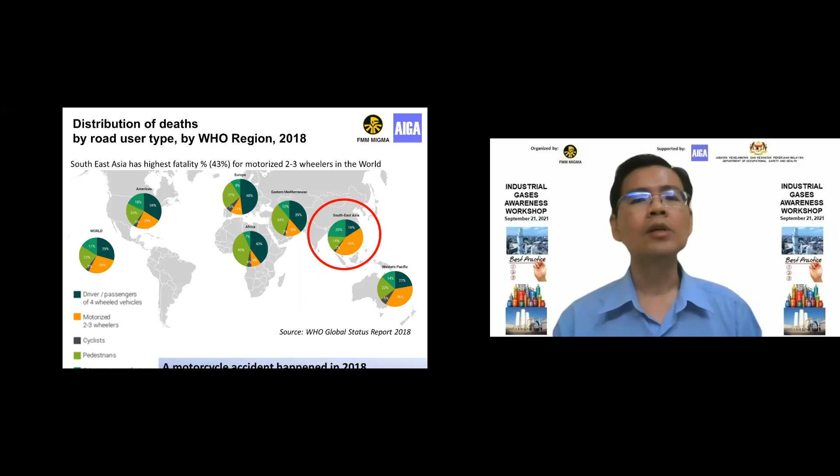Back in 2019, next slide please. We were together with AIGA on this two-wheeler fatality prevention program.

If you look at the statistics here, from 2017 until 2020, this is our AIGA members' statistics in India. In India, we had 6 fatalities related to motorcyclists or two-wheelers, Malaysia had 5 cases, and Thailand had 4 cases. So we know this is a very high risk in Malaysia as well.

So MIGMA was tasked to roll out this fatality prevention program. When we did the analysis, we found the majority involved our youngsters. So we thought, why not have local university students talk to young people? That's why we have this motorcyclist safety video competition.

So in order for those students to understand our requirements and safety information, with help from AIGA and MIGMA, we conducted a seminar for all participants to tell them what safety information they need to input into their videos. We had good participation from all the local universities.

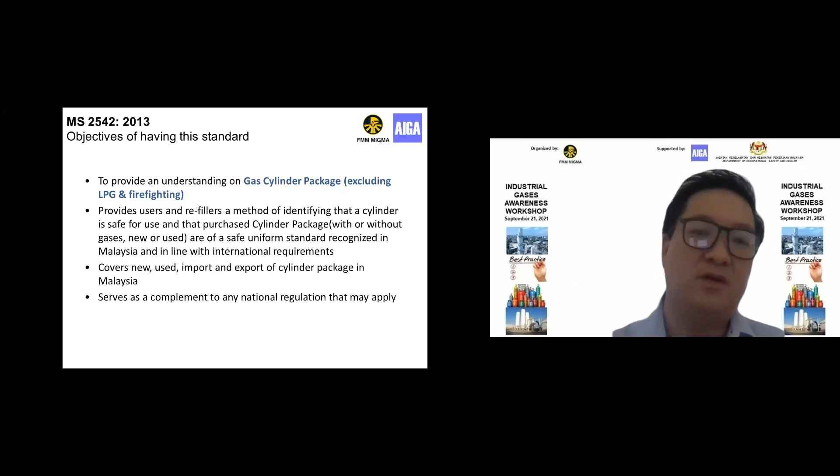It is to complement whatever practices the industry is doing with any national regulation that might be adopted. So a brief standard of MS2542: it covers new and used cylinders. There are two annexes that cover this. Annex A is the design codes of the standards that we adopt. Annex B covers the testing, manufacturing, and design of the specific cylinder itself. It also looks at the compatibility of the material with both the gas cylinder and the valve, looking at the specific gas type to the compatibility of the material that the gas stream would touch. Of course, the gas cylinder must satisfy GHS requirements and transportation of hazardous goods, and this is identified inside the standard as well.

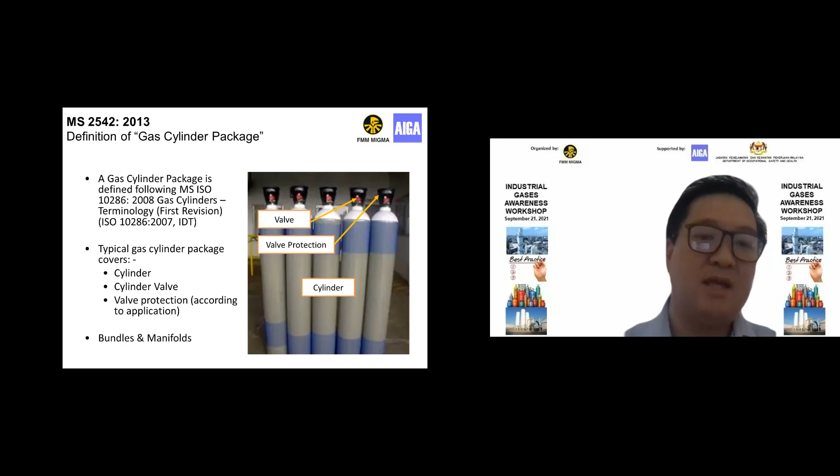Okay, say a gas cylinder package, how do we term it as safe? There are 4 key criteria that we have to ensure. The first is to ensure that it is resistant to mechanical loading. Loading in the sense that we fill and pressurize the cylinder, therefore stressing the vessel. So it needs to take into account the cycles that it's taking. It needs to withstand that. It needs to be able to retain the pressure as well. It must not leak, and it must be compatible with the material and also resist corrosion, because externally it is still exposed to the environment.

Yeah, big one. Maybe next.

Next, okay. So the 4 criteria: resistant to mechanical loading. We have to, number 1, ensure proper manufacturing of the material itself. We have to have sufficient thickness and also proper maintenance of the gas cylinder. The cylinder valve has to have the ability to withstand high impact, and also the valve protection, if used, should follow ISO 11117.

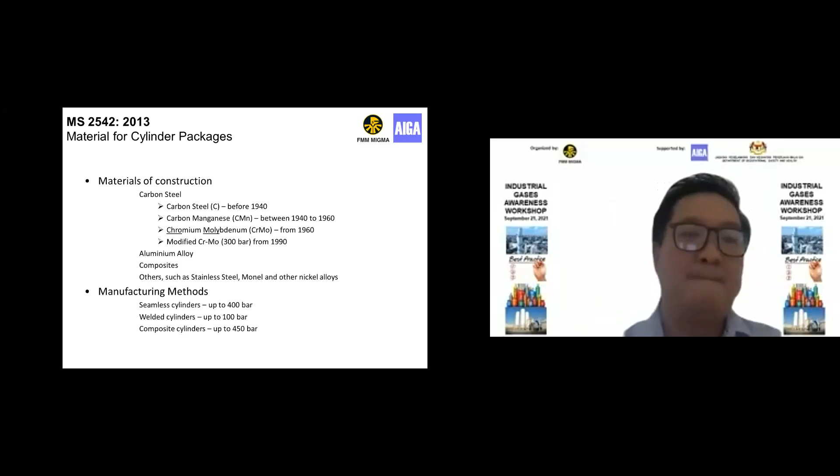Carbon steel, the most common, is the heaviest of all the cylinder types. It's used for hydrogen and its mixtures, but the material composition needs to be looked at. It needs to withstand sustained load cracking due to hydrogen embrittlement, so a special component needs to be added to the material while manufacturing these cylinders. It's vulnerable to corrosion from moisture, and not recommended for CO and CO2. RPV or NRV valves, which I'll go through later, are recommended to ensure minimum internal corrosion due to ingress of air and moisture. Next.

Carbon steel cylinders, corrosion. It's very important for us to keep the cylinder internals dry. Production processes are important to ensure that the gas we put in the cylinders is safe. What we have found is that the higher the pressure, the higher the strength of steel used, and the more susceptible it is to corrosion.

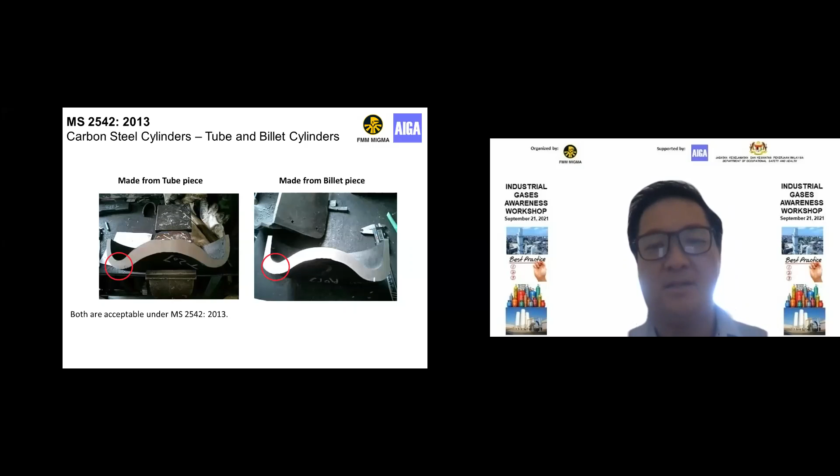Stress corrosion cracking, carbon monoxide. We do not recommend carbon steel cylinders for a CO gas stream because of the risk of stress corrosion cracking. There will be transgranular cracking appearing in the material itself that reduces the effective efficiency of the cylinder in handling the stress. Okay. Next big one.

Aluminium cylinders have normally been used since the 1950s, the majority in military. After that, they moved to be used in beverage, scuba and firefighting rescue because of their light weight. It's 1/3 the weight of steel, but generally more expensive, 3 to 4 times more expensive.

It is good against the corrosion that affects steel, but as said, moisture and acidic solutions are an issue. Heat is also a problem. Therefore, plastic test rings need to be used to detect if the cylinder has been subjected to heat. The normal temperature we would control it at is around 80 degrees C.

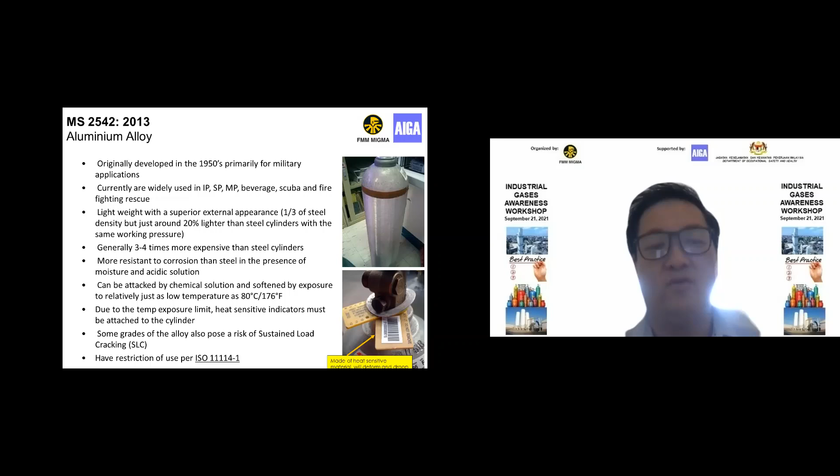So when we handle it and put it in the outdoor environment, we would normally put it in the shade. In the sun is okay because the heat of the sun on the cylinder will normally bring it up to about 60 odd degrees C at the most. Bear in mind that some cylinders need to be monitored against sustained load cracking for some materials of aluminium. Okay, next one.

Composite cylinders, fiber wrap cylinders, are the latest technology. They have a limited life of 15 to 25 years. They are actually plastic lined cylinders with internal, normally stainless steel, wrapped externally with a fiber.

So these are very, very light and can withstand very, very high pressures, normally above 300 bar. But because the fiber wrap is important as an encasement, additional care needs to be taken when handling these cylinders. Okay, next.

MS2542 is the reference standard we are using, the base standard, I could better term it that way. The base standard that we are using for manufacturing of cylinders is basically MS ISO 9809. This is not reverse engineered, but adopted from ISO 9809. It was developed in 1999, and it covers the design, prototype testing, and the mechanical testing of cylinders.

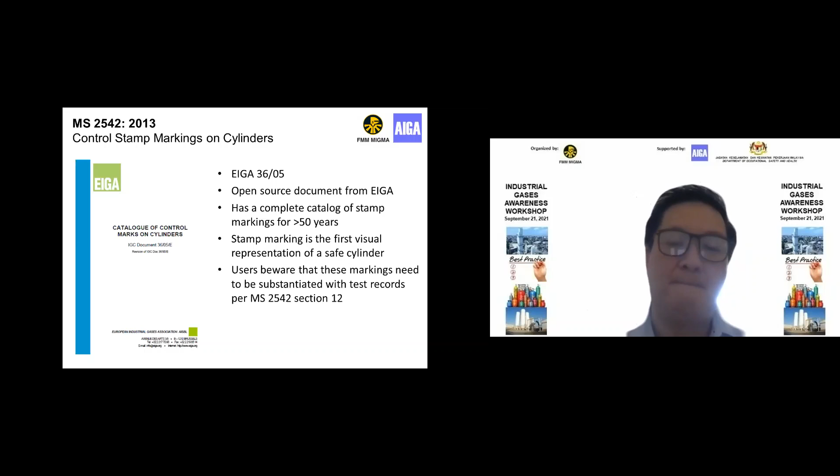One note of caution is that these stamp markings need to be substantiated with testing records. Okay, next. So after the cylinder manufacturing process and the different types of cylinders, we go on to the gas cylinder valves.

It's used to seal the gas in. It needs to resist corrosion, allow flow of gas, and also control the flow to a certain limit. It protects the cylinder from internal contamination. RPV valves last for a long time. Experience in the industry shows that 30 years so far is the limit. And it needs to resist abuse from users, mainly. Okay, thanks.

There are two main categories of valves: basic simple valves and complex valves. I'll go through the terminology between these two later. Materials: copper alloy, brass predominantly, are used for the valves. Stainless steel, nickel, carbon, as well as aluminium alloys are very rarely used. Again, the reference is ISO 11114 part 2 for valve compatibility. Sorry, typo error here. Next.

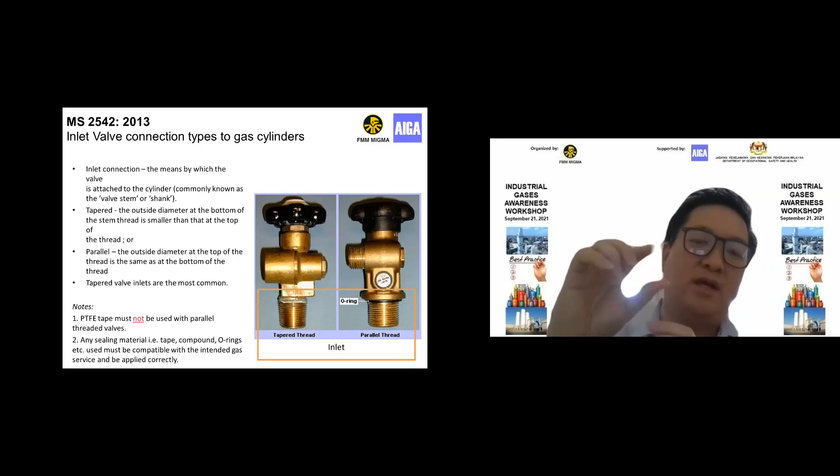There's actually parallel, which is on the right hand side, and also tapered. Tapered has an angle to it. So the only thing to observe here is for tapered, we put PTFE tape around the thread. For parallel, there must not be any PTFE tape around it, because as we screw the valve in, the PTFE will compress and push up. That will compress the O-ring, which might not seal the gas properly. So PTFE is not used for parallel thread valves.

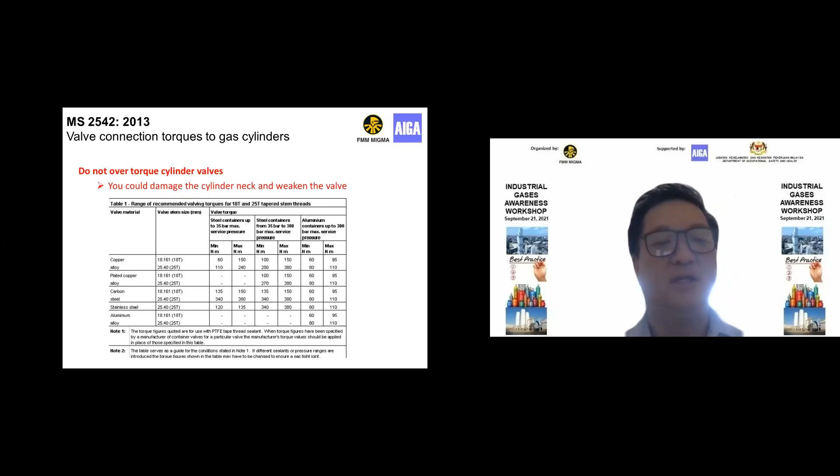Okay, next. Torque limit is important depending on the material of the valve and also the cylinder. A different torque would actually damage either the cylinder neck or weaken the valve by stretching and then work hardening the brass valve itself. You'll be able to see that there are different torque limits for the valves.

So oxidizing has a different connection versus a flammable gas connection. Flammable has a left-hand thread, which is anti-clockwise movement, while a clockwise movement is for oxidizing valves and inert valves. So there is no way to mix up these two together. Other connections such as pin index for medical use are available as well. Next slide would be for medical.

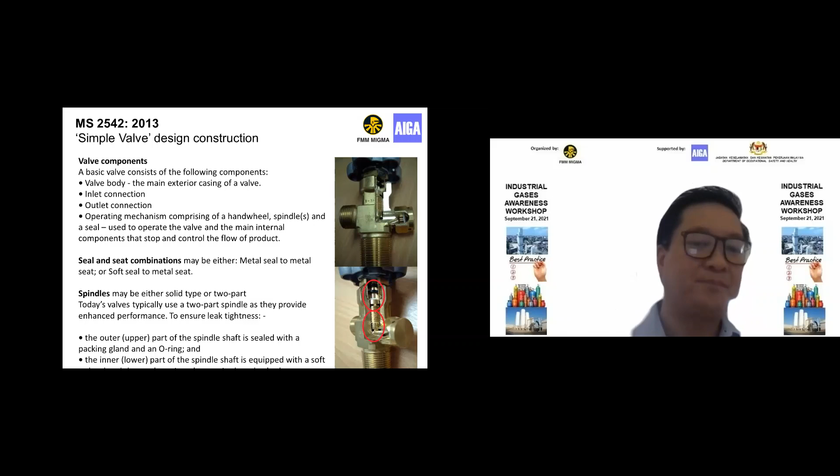The spindle can either be a single part or two parts. In our industry, normally it is two parts. For the newer valve designs, it is two parts. Okay, next.

Okay, there is a benefit here, in that the cylinders can be top filled because the gas inside the cylinder is maintained. Of course, additional checks are needed to ensure that the valve is actually operating well before it's sent in for refilling. As you can see, because there's like a check valve, it prevents the gas from actually flowing back into the cylinder.

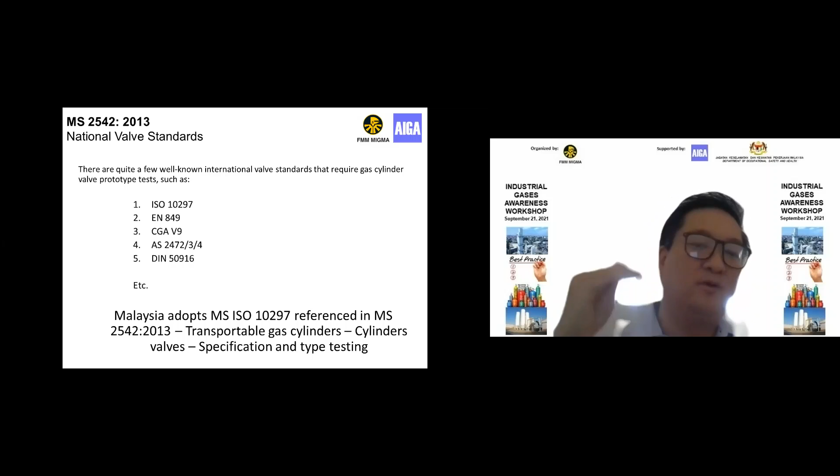Okay, next. So the standard for the valve that we adopt in Malaysia is MS ISO 10297. It is referenced in 2542 as well. MS ISO 10297 is actually a combination of standards. You can see EN, CGA, DIN, AS is also inside there. The testing of the valves follows protocols identified here. I've put in some examples of ISO 10297, EN 849 as the test standards that are being used.

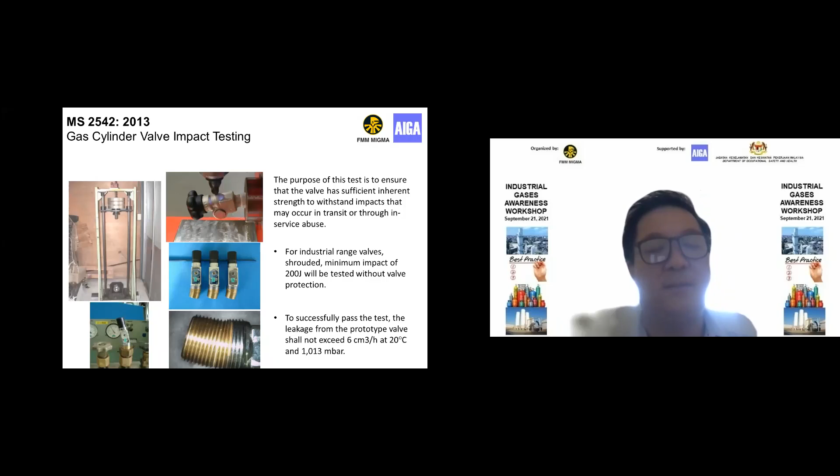Okay, there is also what we call a flame impingement test, whereby they subject the valve to high heat and a flame. It's very, very high temperature for a short burst period of 1 minute to see whether it can withstand the temperature. After that, it is cooled down and tested again to ensure that the valve still has the capability to function, what we call function, as in it can be closed. Okay.

Gas cylinder valve torque testing. This is to ensure that if the valve is subjected to a high torque, it does not break catastrophically. So this test provides a criteria of how the testing needs to be done to ensure that even though there is over-torquing, the valve does not shear. Okay, that's just a brief on it. Next one.

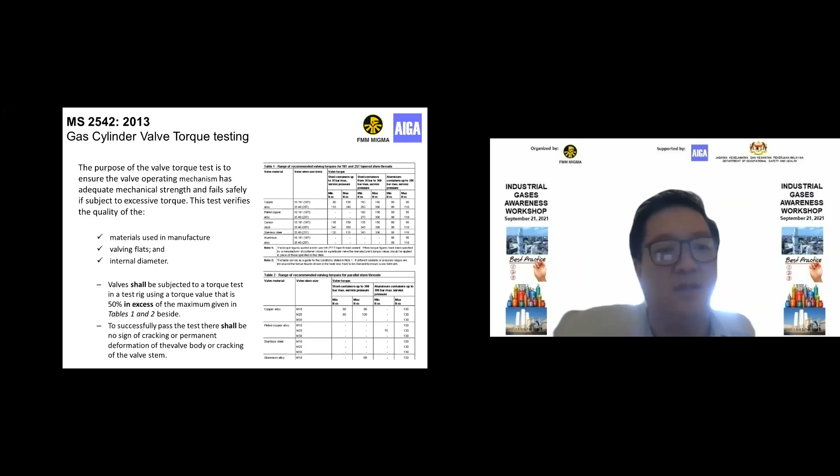Type testing. Okay, it also covers the pressure tightness, to test the pressure leaking of the valve itself. Sorry, this one is actually for leak testing. Okay, so leakage rate is tested to ensure gases such as flammable and toxic are sealed in the cylinder itself, and do not leak out to the environment. So this test requirement covers that process. Okay, next. I'm a bit slow on the time.

There's also endurance testing on the valve. Okay, endurance testing is the cyclic effect that we subject the valve to, how many times opening and closing of the valve. That relates to the number of cycles, which relates to how many years the valve can be in service. So testing how many times it opens and closes will confirm the durability of the valve in that period of time.

Bearing in mind that there is also an age of the polymer of the valve itself. So that age of the polymer subjects the valve to scheduled maintenance, which is covered under MS 2542 under a substandard category of the standard itself. Okay, next.

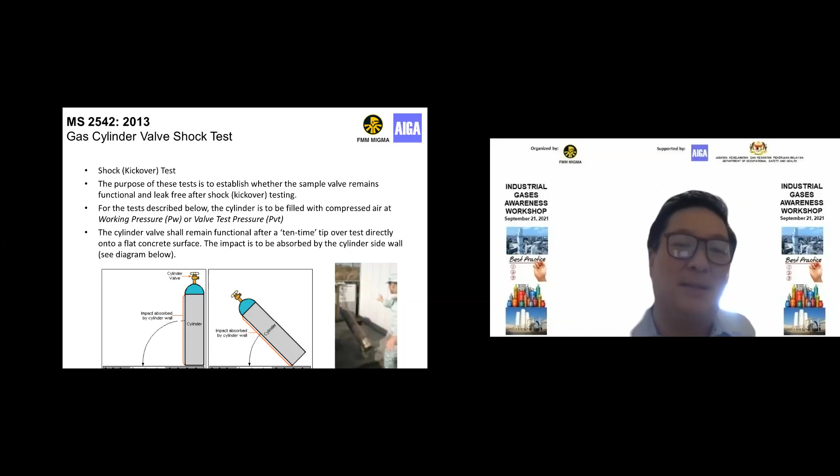Okay, this one is more relevant to our industry, cylinders falling. So as a gas cylinder falls, the valve will be subjected to a certain shock. During that shock process, the valve needs to be able to withstand that criteria. The test identifies that it needs to go through the tip over test 10 times. Okay, so I would say it's a practical way for us to identify whether it can withstand or not. Okay, next.

Salt spray test. Our cylinders go through an environment whereby we are subjected to the sea environment. So the neutral salt spray test will identify whether salt or what we call chemicals will subject the cylinder to pitting, okay, or corrosion.

After this test, the cylinder valve is actually taken out. We actually do a micrographic examination of the material, the corrosion on the surface itself, to see how much it has actually pitted or eaten into the valve material itself. So that amount of pitting will identify whether it is able to withstand the corrosion or not. Next one.

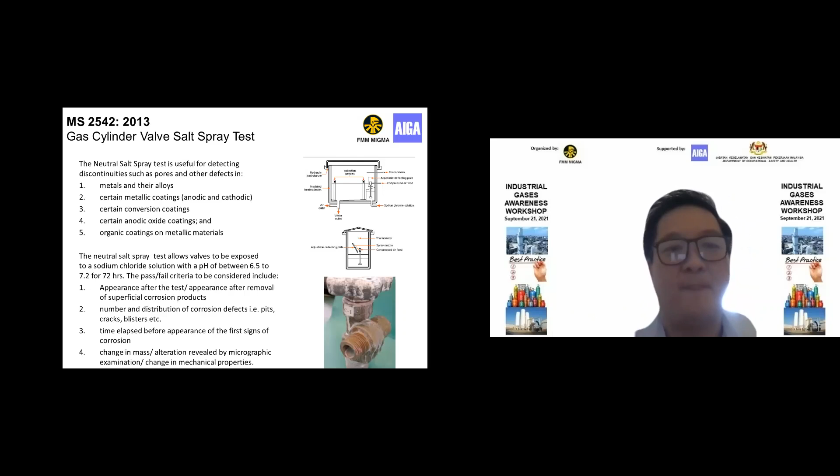Okay, next. Valve protection. Next slide. So, some images of cylinder valve guards and protection that are used in the industry.

So for cylinder valves that meet MS2542, the standard identifies that it is not mandatory to have valve guard protection. It should be applied depending on the risk assessment of how the cylinders are handled, and also the environment that the gas cylinder is subjected to. So in certain conditions that are high risk, where a fall is a high risk, then of course valve protection needs to be used. On the right hand side are some examples of valve protections used in the industry. There are metal and also plastic types used in the industry.

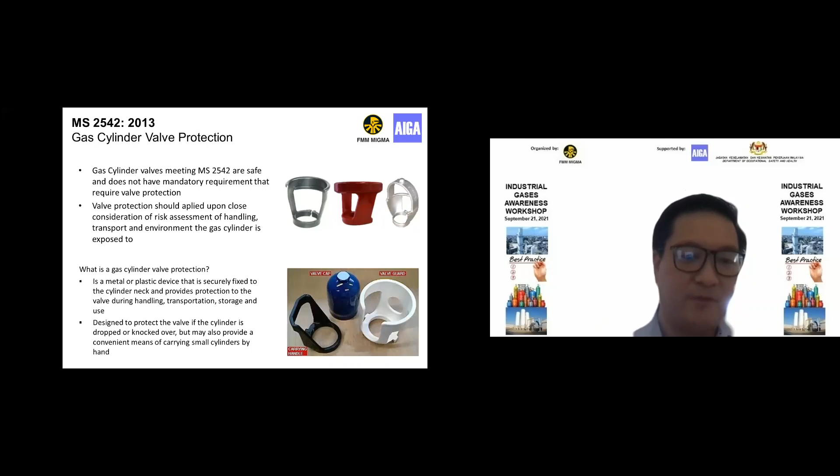So an image of how a valve protection should be: it should cover the entire valve itself in terms of its radius and also the height. It should not expose any part of the valve in any way when the protection is up.

So for valve protection, this is the test that is done. They do a torque, axial, and also a drop test on the valve itself to ensure that the valve can withstand. The standard that is adopted is EN 962.

Next slide. So a torque test is to ensure that the valve guard interfacing with the neck of the cylinder does not come off. It is to ensure that it grips at a particular moment when it falls, and it doesn't come off and then affect other things. There's also an axial test to test the mechanical strength of the valve protection, and also a drop test. The image just now shows dropping it to see how it takes the damage and also the impact. So I think that's all.

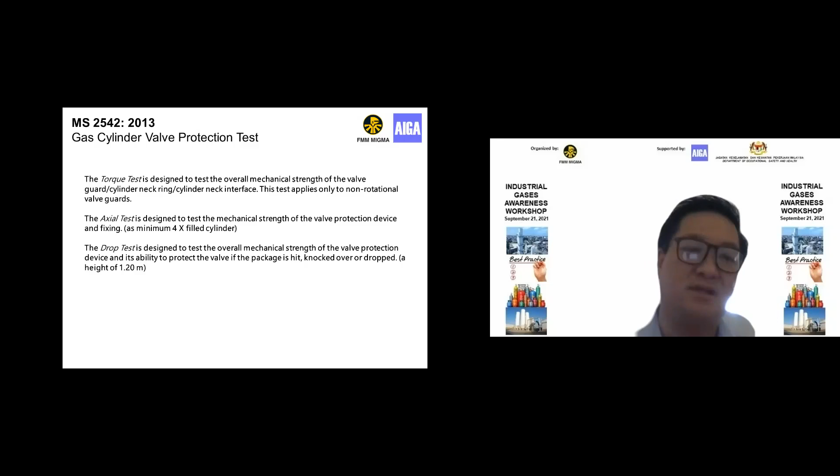We'll move on to the next presentation, which is on ASU process and cold box design. This will be presented by Ms. Jesselyn Tan of Asia Industrial Gases Association, AIGA. A brief introduction of Jesselyn: she is currently a process safety engineer for Southeast Asia Cluster Large Industry of Air Liquide. Her previous work experience includes technical risk and safety consultant in the oil and gas industry, on-site engineer in a power plant, and safety engineer in a catalyst plant. With that, I pass the floor to Jesselyn for her presentation.

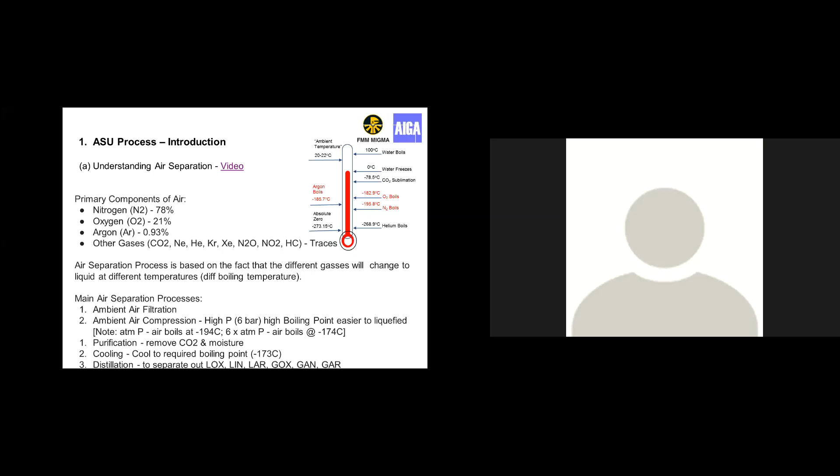Air from the atmosphere is filtered to remove dust particles and other hard impurities. Then the filtered air is compressed in a compressor, up to 6-bar pressure, to make the air flow from start to end of the process. If the air is compressed, then temperature will increase due to increase in kinetic energy of air molecules.

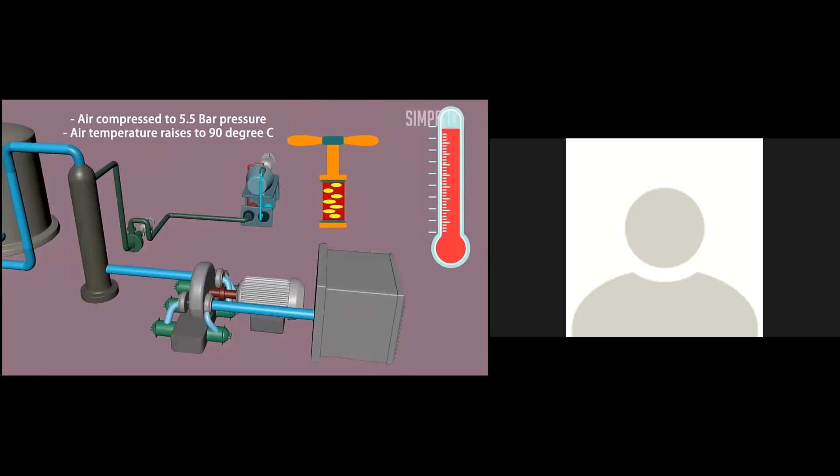So the high-pressure air, at high temperature, is cooled in the pre-cooling system to around 10 degrees Celsius using refrigerated water. During this cooling process, air will capture additional moisture as it is in direct contact with water.

So at this stage, high pressure, low temperature air has impurities like water, carbon dioxide and hydrocarbons, which are not required for us. Water, hydrocarbons, and carbon dioxide are removed in the purification units, using molecular sieves and activated alumina. If water and carbon dioxide are not removed, they will form ice in the lines, resulting in blockage of the air path.

If hydrocarbons are not removed, it will result in explosion if it accumulates. Now, at this stage, low temperature, high pressure air contains only oxygen and nitrogen.

This high pressure air is then expanded in a Joule-Thomson valve. This adiabatic expansion results in a drastic drop in temperature from 10 degrees Celsius to -120 degrees Celsius.

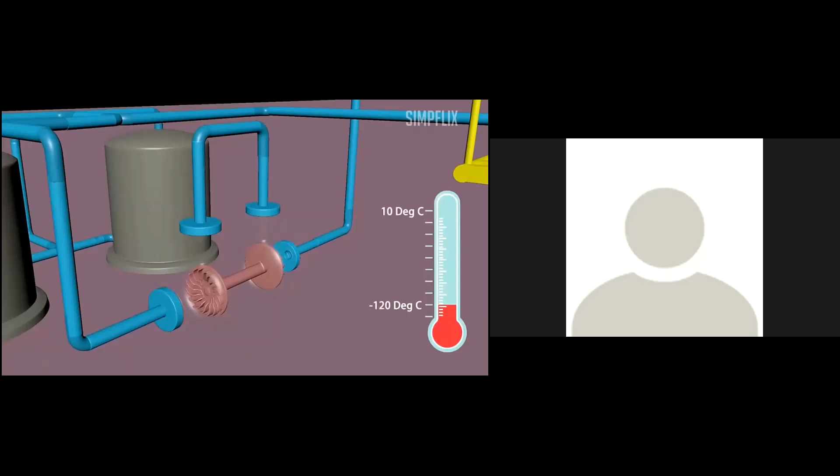Then this expanded air is passed to the fractional distillation column. Cold air passes through the heat exchanger and fractional distillation column. Air temperature is -165 degrees Celsius.

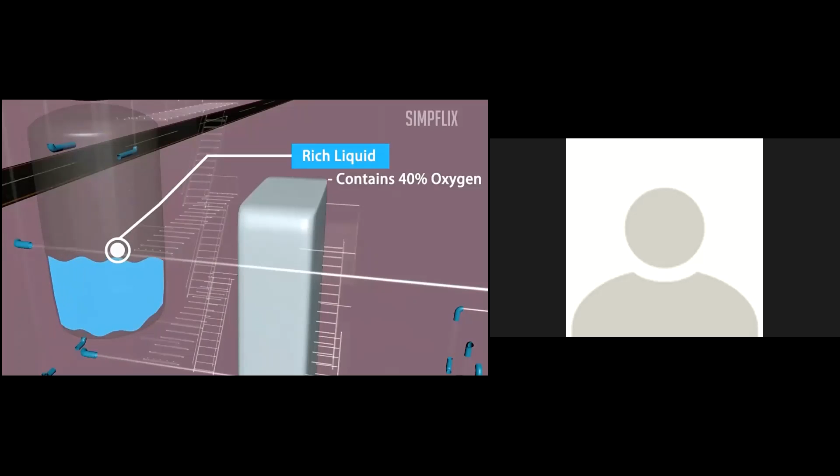At this temperature, air inside the fractional column will get liquefied, and this liquefied air has 40% content as oxygen. This liquid is called rich liquid, as oxygen is taken and given as reflux at the middle of the fractional distillation column. This cold, rich liquid...

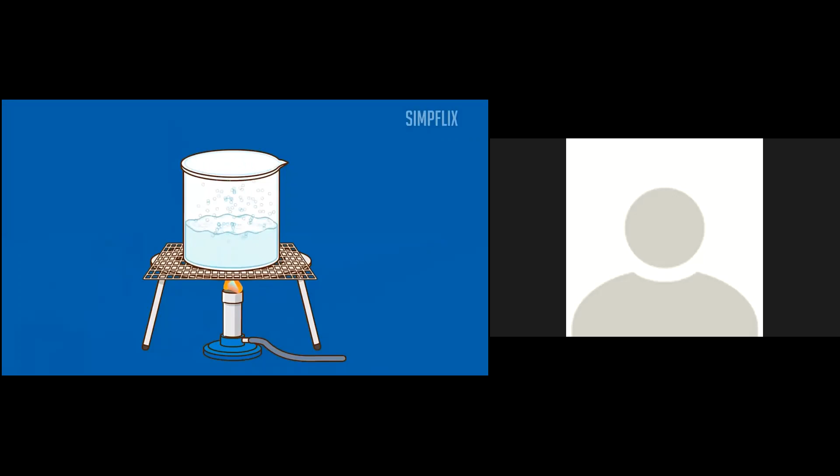This vapor will get condensed, and the remaining nitrogen will escape to the top. This is because nitrogen has a lower boiling point than oxygen. This process is similar to the condensation happening at a vessel with boiling water when closed with a lid - because of the lid's coldness, escaping water vapor gets condensed. In the distillation column, cold reflux acts as the lid.

To have proper contact inside the distillation column, trays will be kept. Sieve trays, packings are also used, hence proper heat exchange occurs. By repeating this process for a long time, a temperature gradient forms from the bottom of the distillation column to the top.

From -170 degrees Celsius at the bottom of the column to -196 degrees Celsius at the top of the distillation column. Because of this temperature gradient, oxygen will be liquefied at around -183 degrees Celsius area and collected.

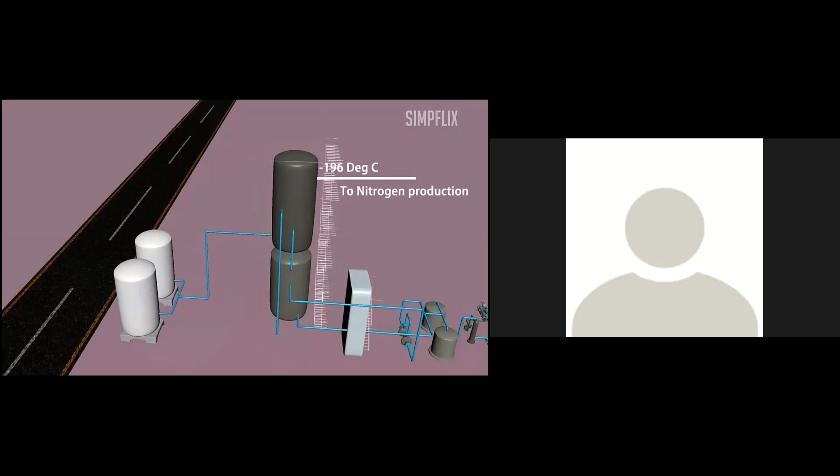Argon is liquefied at around -186 degrees Celsius area and collected. The top temperature is at -196 degrees Celsius, where nitrogen is collected.

Normally, the height of this distillation column will be around 40 meters, depending on the production capacity of the oxygen plant. Oxygen produced using this technology will have a purity of 99.5%. The liquid oxygen produced can be taken as a liquid product and stored in insulated cryogenic vessels.

Later, it can be transported and converted to gas using vaporizer coils. This gaseous oxygen can be used for distribution to end users. The advantage of transportation in liquid mode is such that 1 cubic meter of liquid can be converted to 700 cubic meters of gaseous oxygen.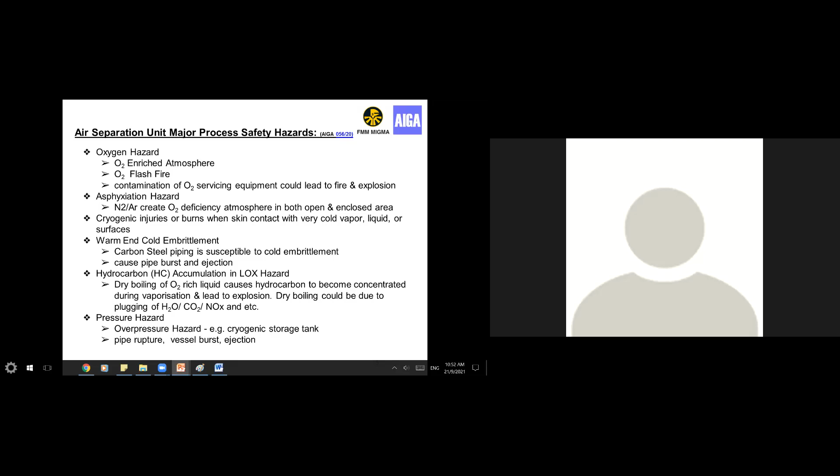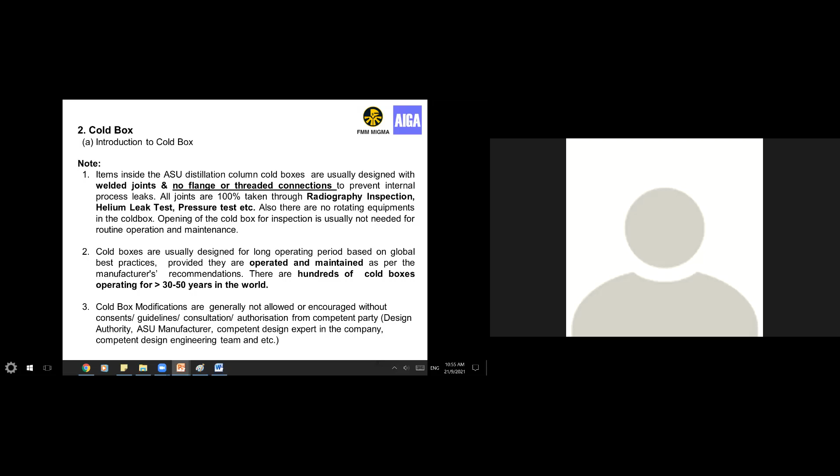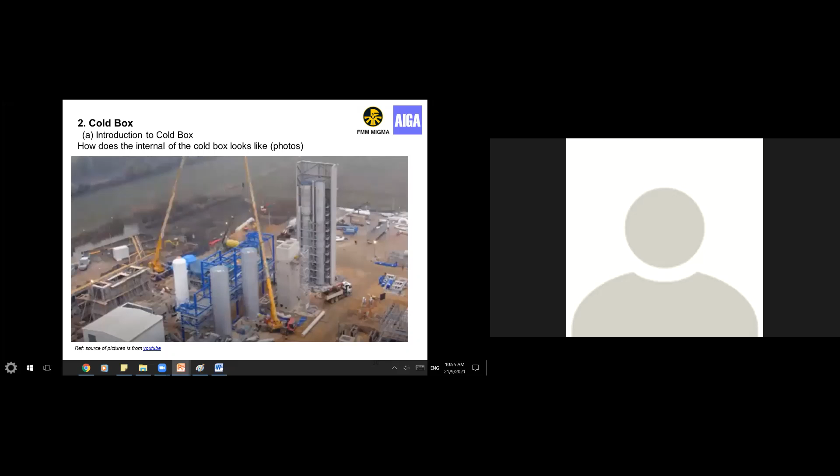This photo shows the internal of the cold box during construction. If you look at the tall cold box, which is opened up with two columns inside, those two columns are actually the distillation columns, can be a nitrogen column, argon column, or oxygen column.

Next we will go through the safe operation of cold box. It's essential to ensure the atmosphere inside the cold box is monitored closely and within normal range, for example the purge gas pressure, flow, and composition, as purge gas is usually injected into the cold box continuously.

Manufacturer SOP shall be available for different operating and maintenance modes, including warm startup, cold startup, normal operation, cold shutdown, warm shutdown, and also recommendation for periodic inspection and maintenance of the cold box.

Next we will brief through some process safety incidents involving poor cold box management. What happened here is about the presence of an ice block inside the cold box. The ice block was not detected before plant startup. As a result, during warm startup, the ice block in the cold box limits space for piping thermal expansion.

This led to pipe bursts and leakage occurring in the cold box. Eventually, the plant could not start up and needed to shut down. The major cause of ice block formation inside the cold box is due to moisture from the air entering the cold box. So how did moisture ingress occur?

This was due to insufficient cold box nitrogen purge, leading to insufficient positive pressure inside the cold box. As a result, higher atmospheric pressure causes water to enter through cracks and holes on the roof or casing panels, with lack of corrosion control.

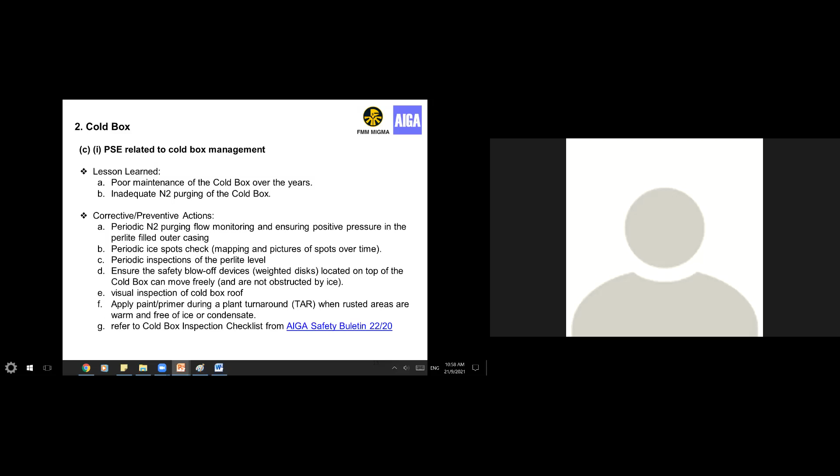Sixth is applying paint or primer during a plant turnaround where rusted areas are warm and free of ice or condensate. Seventh is to refer to the cold box inspection checklist from AIGA Safety Bulletin 22/20. We will further discuss this in the upcoming slide.

Second incident: what happened was the perlite in the cold box was removed to allow a local pressure vessel inspector to inspect the vessel in the cold box. An inexperienced contractor was engaged and they decided to remove the perlite from the bottom of the cold box, not from the top as required by the SOP.

Perlite removal at the bottom caused a steep slope of perlite in the cold box. The perlite then collapsed, generating a force that lifts the cold box relief devices, relief valve, and releases the perlite into the environment. So perlite release can be hazardous to both environment and human. If there's any internal process leakage saturated in the perlite, a large cloud of O2, N2, or argon can form from rapid vaporization.

Due to the safety concerns of a possible perlite release from deperliting activity, and also the possibility of moisture ingress into the cold box, ASU manufacturers generally would not advise opening the cold box for periodic inspection. It will only be done if there's an unexpected leak due to improper monitoring and operation.

All right, so what can we do to ensure safe operation of cold box? First, we need to ensure the periodic inspection of the safety control devices to manage the major process safety hazards, as most past incidents of ASU are from this process hazard, not the cold box design itself.

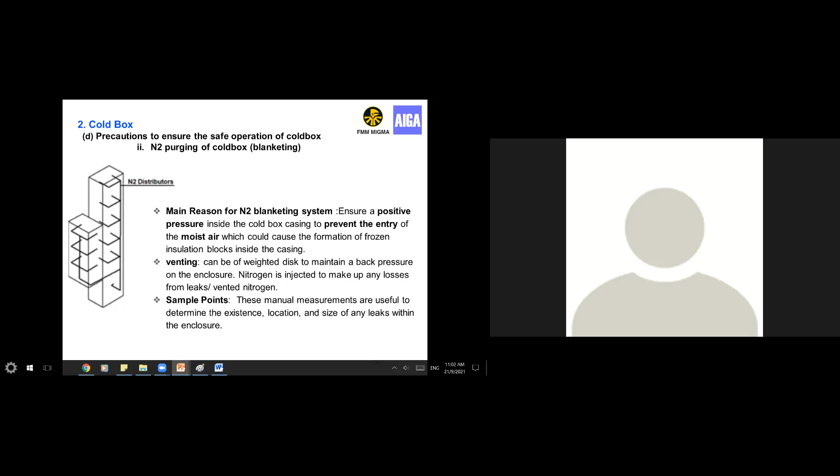The cold box needs to have a venting system to prevent overpressure and accumulation of hazardous gases. It can be a weighted disc to maintain a back pressure on the enclosure. Sample points at different heights of the cold box shall be available to allow complete periodic inspection. N2 purging shall be distributed evenly throughout the whole height of the cold box via a distribution system shown in the picture on the left. Next slide, please.

Right. So this slide is to discuss what needs to be inspected and maintained periodically to ensure the safety of the cold box. First is to have the temperature check at the bottom of the cold box to ensure the required temperature is maintained and no leakage. Second is to draft procedures for operator response when safety alarms are activated. Third is periodic monitoring of sample points to ensure proper purging in the cold box. These sample points shall be located at different heights throughout the cold box.

And fourth is continuous O2 detectors complete with SOP for monthly inspection. Fifth is a visual inspection for ice spots on the cold box casing. All these inspections are important as they help the site to identify initial abnormal conditions in the cold box and allow the site to have enough time to plan for mitigation, monitoring or repair before it escalates to a major accident. Next slide, please.

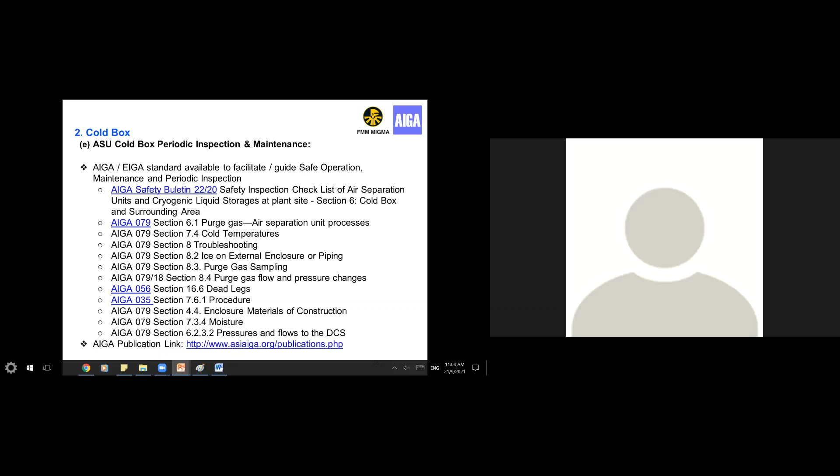All right, this slide shows a list of EIGA standards available to guide safe operation and maintenance of cold box, including periodic inspection. You can click on the link here at the bottom to go to the AIGA publication website for more references. These guidelines are free for download. Next slide, please.

All right, so next we have the cold box periodic inspection checklist from AIGA Safety Bulletin 22/20. I have attached the link over here also in the blue color. Basically the important points over here we have already explained previously. However, I will still briefly go through the list below. So first is cold box pressure, such as the nitrogen purging pressure, needs to be regularly recorded. Check for any abnormal ice patches at the cold box casing.

Are gas samples being taken from the spot areas for analyzing? Is this vent safely exhausted to a safe place? Is this vent free from obstruction? Is the vent vented at an open area and the right height for better ventilation? Is the vent piping free of blockage from ice and etc.? It's also important to make sure the pressure relief devices, such as the pressure relief valve and weighted disc on top of the cold box casing, are not stuck with paint and ice.

So are the cold box foundation temperatures checked at regular intervals? Do liquid drain lines slope downhill into the disposal header? Any cryo liquid accumulation at the drain lines? For derime operations, are procedures followed and inspections recorded to ensure that all drain and instrument lines are free from moisture? Are all the asphyxiation warning signs installed at all high-risk areas? And is insulation material used on cold piping in good order and dry? Next slide, please.

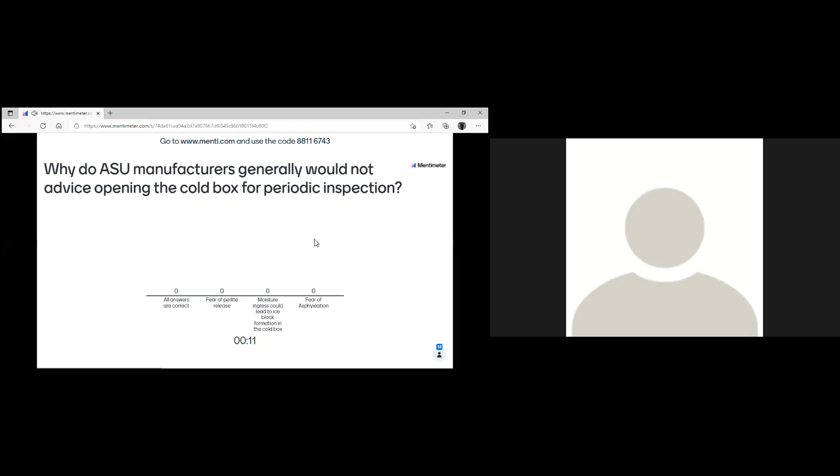5, 4, 3, 2, 1. All right, what's the answer? All right, most of you got it correct. All answers are correct. Okay, who's leading? All right, we have a new lead, Zahrin. Okay, next question.

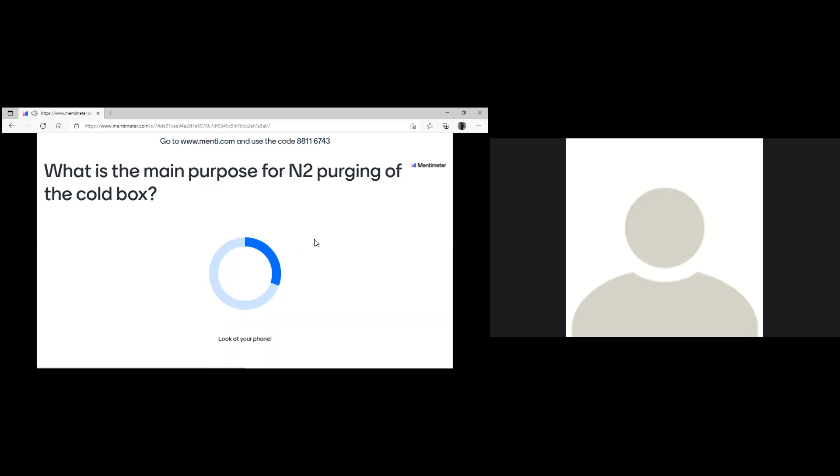What is the main purpose of nitrogen purging of the cold box? To ensure a positive pressure inside the cold box casing, to prevent corrosion, to maintain the temperature, or to ensure no ingress of flammable gas into the cold box.

All right, 5, 4, 3, 2, 1. What's the answer? All right, did you get it right? To ensure a positive pressure inside the cold box. Okay, next. Who's leading? Looks like a new lead. All right. Barefoot Contessa. All right. Next.

Question number 4. This is regarding Anthony's slide just now. Which of the following is part of the gas cylinder package? Gas cylinder and valve, manifold, valve protection, or all answers are correct?

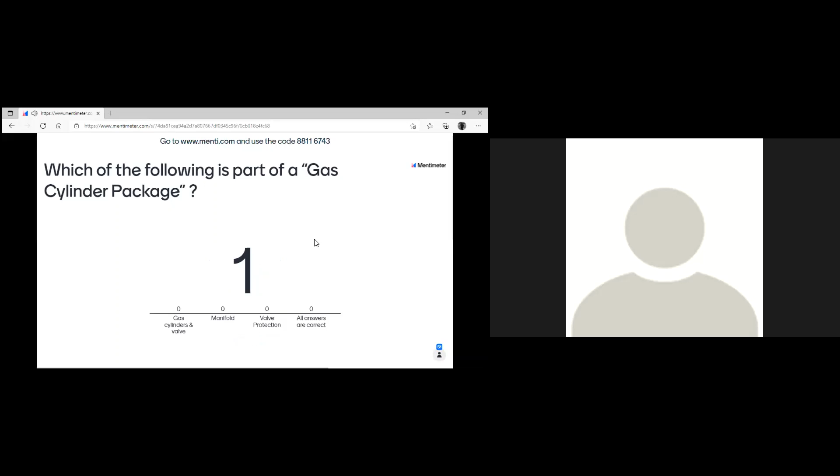4, 3, 2, 1. So what is the answer? Did you get it correct? Yes, most of you got it correct. All answers are correct. All right, who's leading? All right. Sarah. Okay, last one.

All right. That's all. Who's the winner? Sarah. Okay. We don't have prizes for you, but you can be proud that you answered most of the answers correctly. That's all from me. Pass to you.

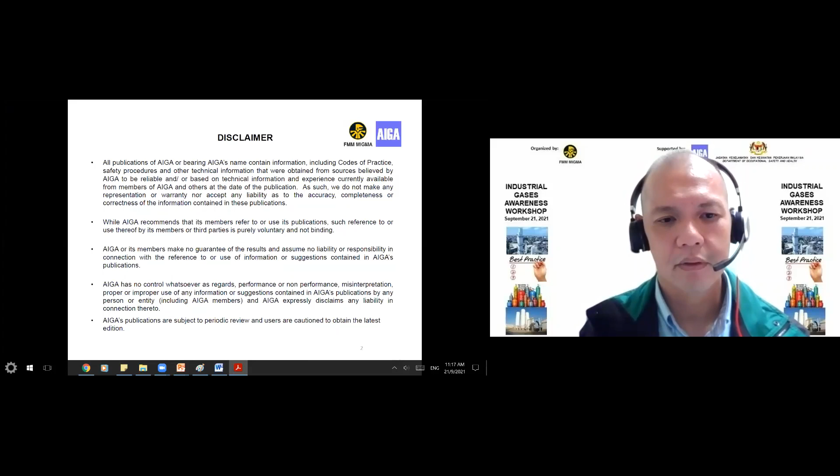Next page. With my slides today, this is the agenda. First, we will go through acetylene cylinders and acetylene's properties. Acetylene hazards, mainly involving flammable risk. Past accidents involving acetylene. Identifying major hazards at the workplace that involve acetylene and its applications. Acetylene cylinder storage, and safe transportation of acetylene cylinders. Those are the 7 major agenda items that I'm going to share. Next slide, please.

Let us have a basic understanding of how acetylene cylinders are structured. As we know, acetylene is a well-known gas, a so-called fuel gas used for cutting and welding by the general public. However, acetylene itself could be very reactive if it's contained in empty cylinders. So what I want to share with the members today is that the acetylene cylinder is different from normal industrial gas cylinders, which are basically empty, but acetylene cylinders contain what we call a porous mass.

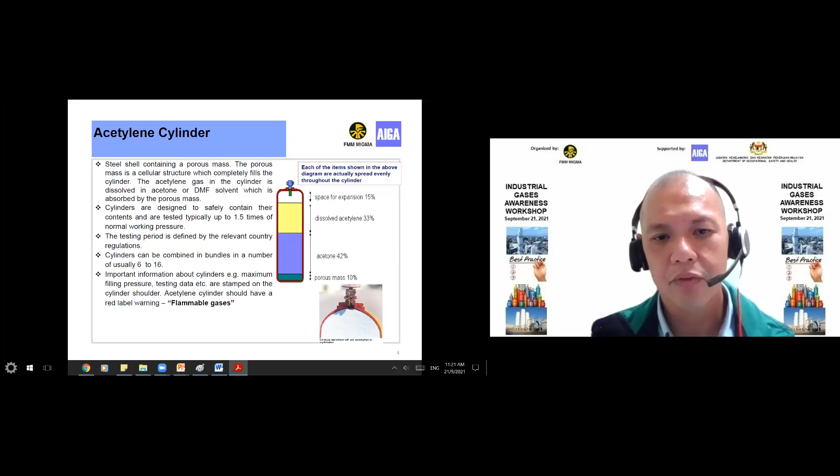Acetylene cylinders can be single cylinders, or combined into a bundle of 6 to 16 cylinders manifolded together. Typically, 6-cylinder configurations are commonly seen in the industry. Important information is normally stamped or engraved on the cylinder shoulder, like the test date, the weight of the cylinder, and the volume of the cylinder. The common manufacturing standard for acetylene cylinders is ISO 3807.

If you look at the right-hand side, there is a diagram that shows the contents within acetylene cylinders. Technically, acetylene is dissolved in this porous mass at a percentage of 33%. The porous mass itself only takes up 10% of the cylinder content. Acetone contains 42% of the volume, and only about 15% of the space is left for expansion.

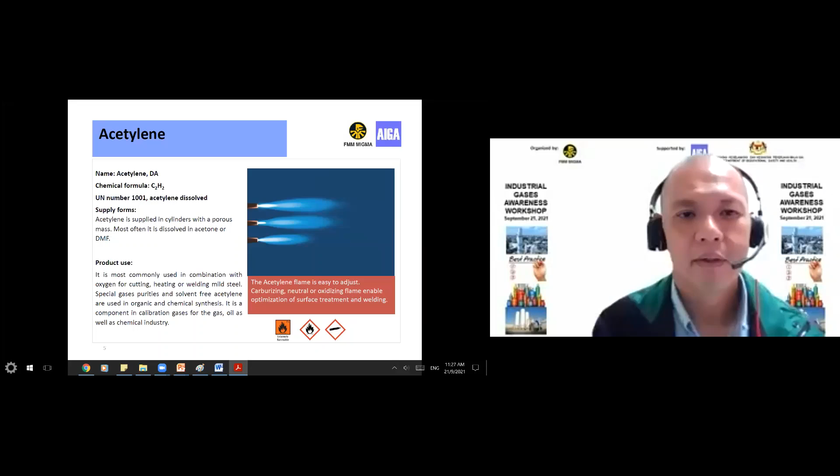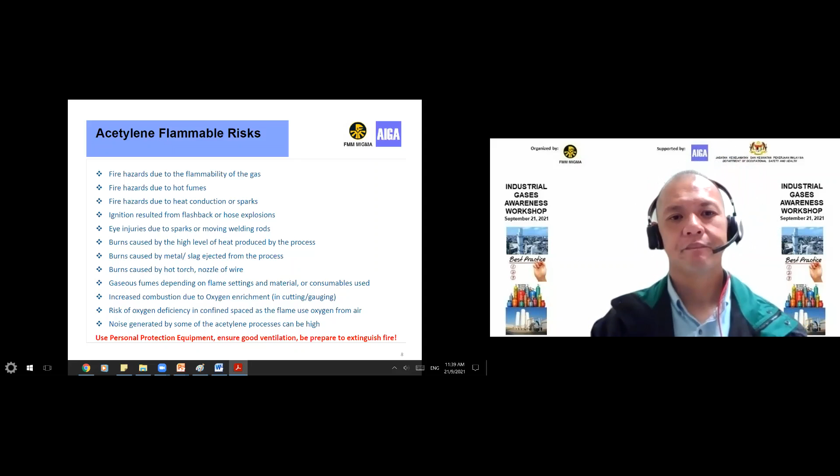Right, so I will share three past accidents that involved acetylene cylinders. Case one over here, this incident happened in the US. There were three DA cylinders, dissolved acetylene cylinders, kept inside a steel cubicle located in the middle of a railway workshop. In the US, there are a lot of these railway workshops doing maintenance. So they kept three acetylene cylinders inside a steel cubicle.

The customer employee noticed smoke and fire inside the steel cubicle, and withdrew, moving the cubicle to a safe distance. The fire continued for about 20 minutes.

At one point, some employees approached the cubicle. A few workers got close to the steel cubicle, and one person kicked one of the acetylene cylinders onto the ground, hoping to put out the fire. But the moment he kicked it and the cylinder dropped onto the ground, it exploded and killed him instantly.

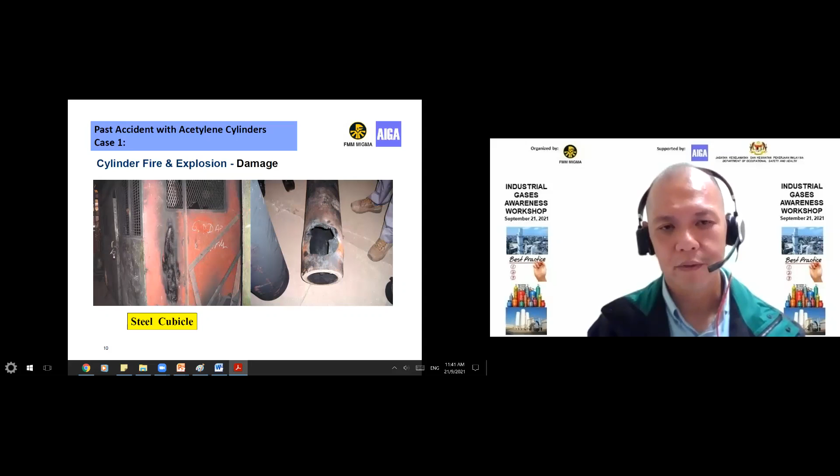Next slide, please. You can see from this picture the steel cubicle after the incident. There is a very big burn hole at the base of the acetylene cylinder where it created the explosion.

So the lesson learned from case 1: a hot acetylene cylinder can instantaneously explode. Do not approach, move, or knock them.

This is especially important to know when an acetylene cylinder has been subject to fire or heat, even if it did not actually burn itself but was subject to very high heat. Please do not approach them, go near them, or try to knock them over. An acetylene cylinder will actually explode under this type of high heat condition.

People who handle acetylene cylinders must be fully informed of hot cylinder procedures. In this incident, the five workers were clearly not aware of, and had not been told, not to go near a heated acetylene cylinder, or not to try to move them. Let them be — if possible, use water to cool them down, and do not touch them. That is the lesson learned from case 1.

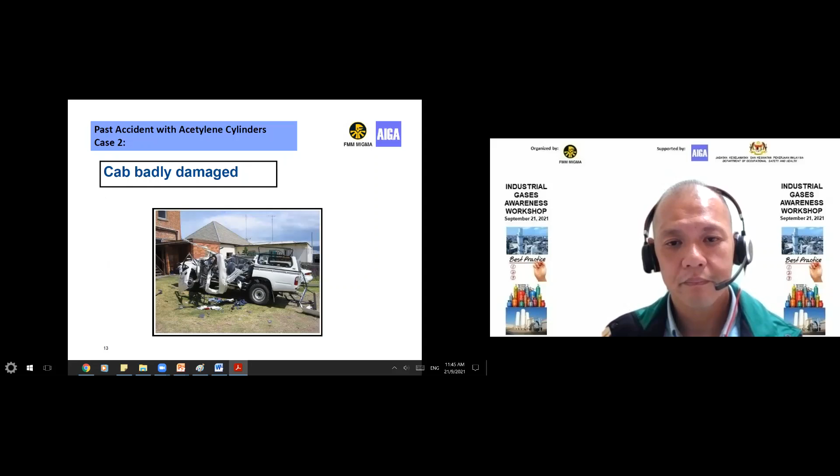Next slide, please. The consequences: the fitter suffered damage to his eardrum and injury to his face. The cab was badly damaged. Fortunately, the fitter was only seriously injured, not killed.

It was not life-threatening. The lesson learned here is: never store an acetylene cylinder in an enclosed vehicle or area, since a leak can create a very explosive environment. Just to recall, acetylene requires very low energy to start a fire or explosion.

Next slide. Case 3 also involved transporting a DA cylinder in a horizontal position, and this happened in Asia. A DA cylinder was lying down on a pickup truck cab on the way to a work site.

After roughly 10 minutes of the journey, the driver of the cab noticed smoke arising from the back when he looked at the rear view mirror. This driver reacted fast enough — he drove the pickup truck to an open air parking area and got out of the vehicle.

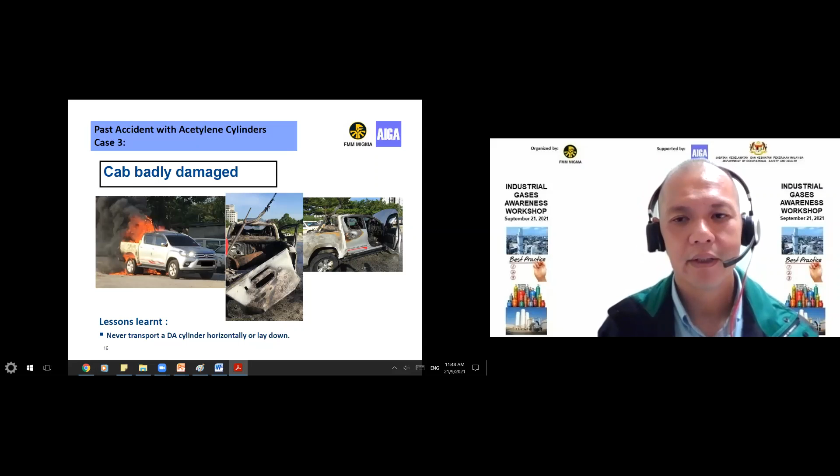Next slide. So here is a typical setup of an oxyacetylene cylinder equipment. Please take note of those red boxes. The red boxes are the recommended necessary safeguards from some country regulations, like in Europe and also in Singapore. Typically for this type of setup, we would need to have a regulator.

The regulator brings down the cylinder pressure to the application pressure. And also for acetylene cylinder, the regulator would have a maximum discharge pressure of 1.5 bar only. Anything higher than 1.5 bar, acetylene becomes very reactive and unstable.

Also, we can see that flashback arrestors are a kind of requirement in some country regulations, and normally flashback arrestor will be installed at the downstream of the regulator. And then there is also a non-return valve at the end of the cutting torch. These are the few standard safeguard requirements for this acetylene cylinder setup.

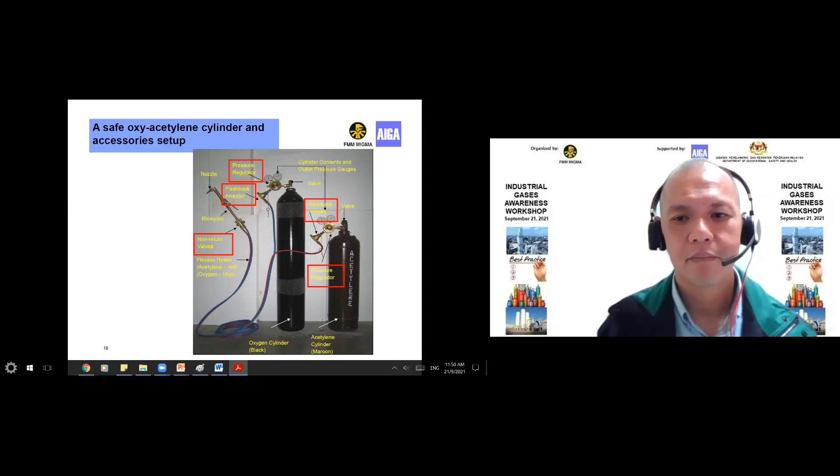Next slide, please. So here is some safety awareness. Acetylene cylinder should be used in vertical position. Don't put it down, don't use acetylene cylinder in horizontal positions. Large cylinders to be secured with strap or chain.

Do not crack open the cylinder valve to blow out dust from the gas outlet. It's very common to see some dirt on the cylinder valve outlet. You just crack open and blow out - please do not do that with acetylene. If you see dirt on the cylinder valve outlet, you can use a clean cloth to wipe it off. Do not use the gas itself to blow out.

Select the proper gas nozzle for the right flow rate for cutting requirements. Before lighting up a torch, purge each of the gas hoses separately for a few seconds - this is to get rid of high oxygen content. Never bring a lit torch near to a gas cylinder.

Sometimes when there is a leak on the cylinder valve, if you bring a lit torch near to it, you can create a fire or even an explosion on the cylinder itself. Do not use acetylene at pressure higher than 1.5 bar - it becomes very unstable.

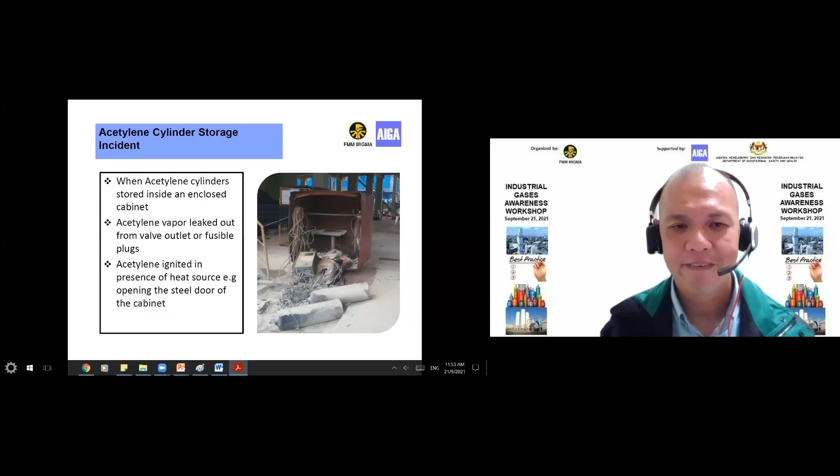Always ensure the gas cylinders are fixed and secure for transportation in the vertical position, and also separate from the driver compartment. Never park a vehicle with acetylene cylinders in an enclosed or covered area or public garage. Please do not park inside there.

When we reach the destination, immediately remove any cylinder from the vehicle and do not store cylinders inside any of the vehicles. Always close the outlet valve of the individual cylinder if it's in a bundle, just to ensure that there is no leakage from the bundle itself.

Next slide. There is a reference material from AIGA. If you are interested, you can go to the AIGA website and download it for further reference. It's free of charge, by the way. With that, I think I have finished my presentation today. Thank you.

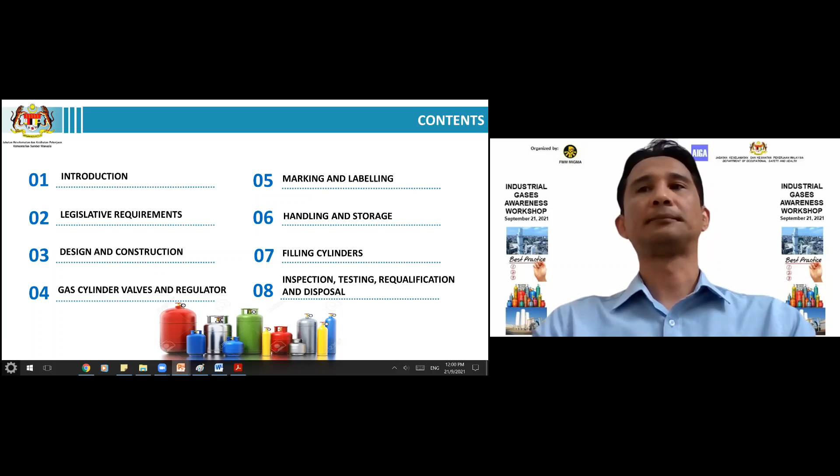I do believe all of us know gas cylinders are used in a variety of industries like water treatment, food processing, laboratories, or even in workshops. But they are most commonly used in medical and manufacturing industries. If we talk about medical industries, what manifests the most now is the use of oxygen tanks for COVID-19 patients. We use a lot of oxygen tanks during this pandemic, actually.

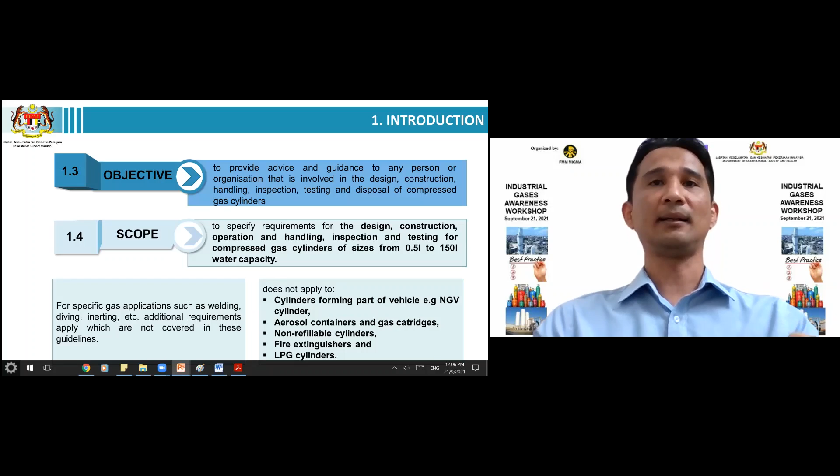Okay, for specific gas applications such as welding, diving, inerting, etc., additional special requirements apply, and it is not covered in this guideline. Okay, let's take a look at the next slide.

Okay, we as consumers will definitely be concerned about the safety of the cylinder while we are using it. Cylinders and their closures must be designed, manufactured, tested, and equipped in such a way to withstand all conditions, including fatigue, either during operations or during transportation. And the cylinder also should be designed and manufactured in accordance with the current cylinder standards.

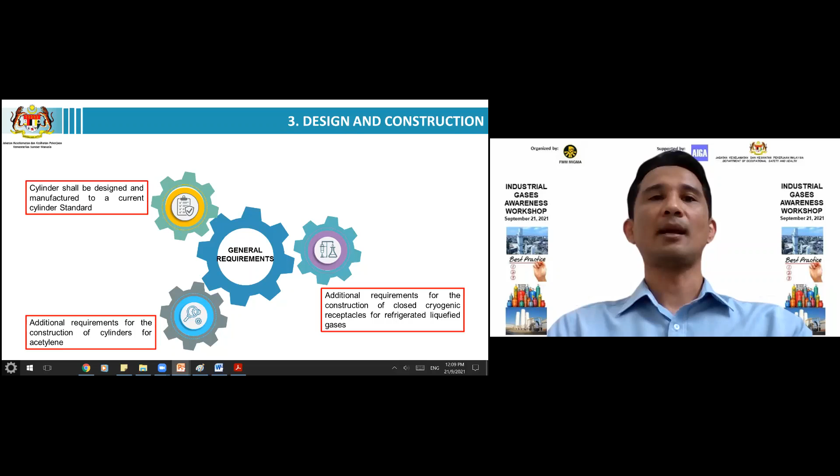In this part also, we have outlined additional requirements specifically for gas cylinders to contain acetylene and refrigerated liquefied gas. Again, as explained by Mr. Elvin, an acetylene cylinder must be filled with porous material, uniformly distributed, so that it can prevent the spread of decomposition of the acetylene in the porous material. Yeah, we heard in great detail about acetylene this morning. All right, we move to the next slide.

Okay, prior to constructing a cylinder, selection of material is very crucial because we cannot afford to opt for a material that is weakened by the dangerous goods intended to be transported, or that can cause dangerous effects to humans or property. We should consider its mechanical strength, corrosion resistance, and impact resistance before we choose which material we are going to use.

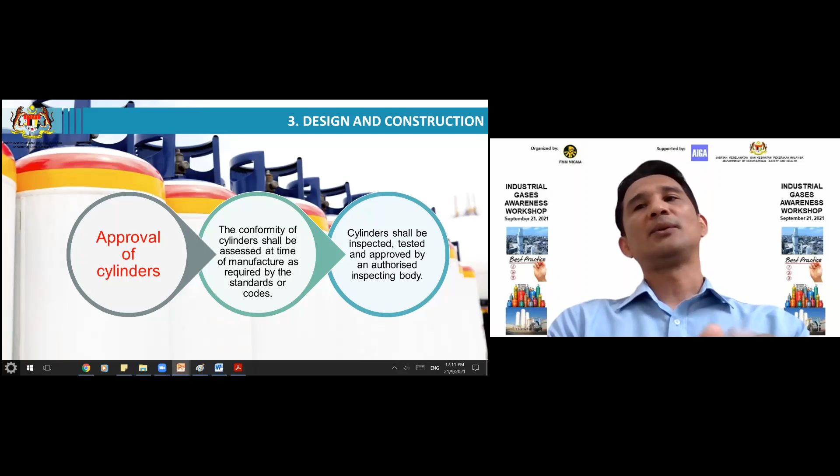Okay, as far as we are all aware, DOSH is not giving out any design approval for this type of cylinder. The conclusion that we can draw from this figure is the role of the inspecting authority is very crucial, as they need to inspect, test, and lastly approve the cylinder. As required by the codes or standards, the conformity of the cylinder shall be assessed during construction, during manufacturing. Okay, let's see what we have on the next slide, please.

Okay, in terms of safety, the valve is as important as the cylinder, and because of that, the valve should be designed, constructed, and tested according to any national or international standard like the Malaysian Standard or ISO. Another thing the manufacturer should consider before constructing any valve is choosing a compatible material, because the valve is going to be used with various gases with different properties. Typically, each valve can last for at least 10 years of service, depending on the usage.

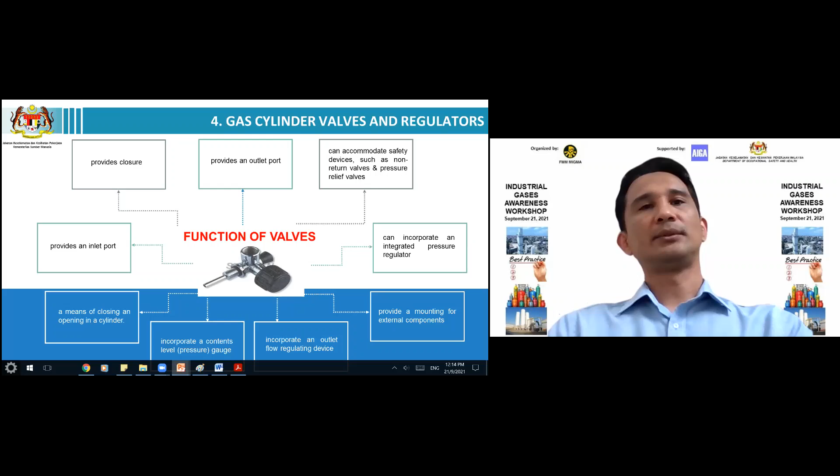Regulators. The regulator is also the most important safety device to be fitted to a gas cylinder before we use it, because its function is to bring down the high pressure of the cylinder to a workable pressure. Regulators come as single stage for short-term applications and two stage for long-term applications. Regulators are also constructed from different materials, mainly brass or stainless steel. They are designed to be fitted directly to the cylinder valve, so no other fittings or lubricants are needed. Regulators for flammable gas are left-hand threaded and have a notch cut on the face of the securing nut, to differentiate them from non-flammable gas regulators.

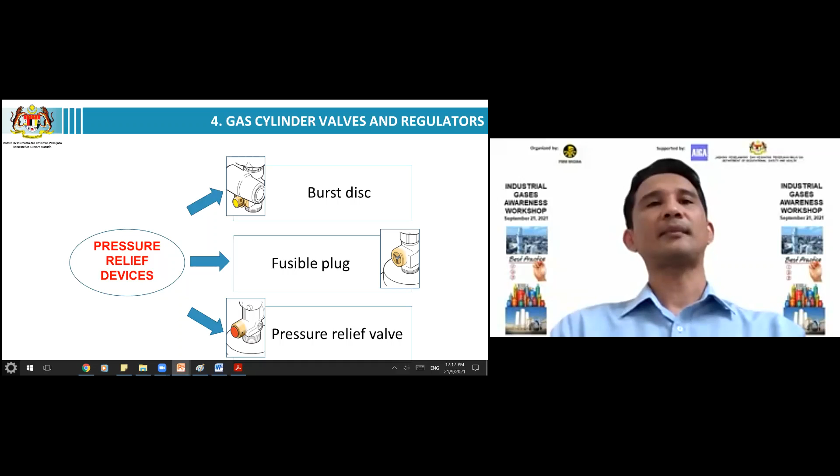Most cylinders or manifolded cylinder packs are fitted with a relief valve. Where excess pressure is encountered, a relief device is designed to discharge the cylinder content either completely or just the excessive pressure, maybe half, maybe three quarters. Discharge of a pressure relief device will normally produce a high-pitched noise and a jet of gas at high speed. As you can see on the screen, there are three commonly used types of pressure relief device: the burst disc, the fusible plug, and the pressure relief valve. Next, please.

Okay, different countries have different color coding systems to classify different gases and types of cylinders. So in order to provide the information of the cylinders, identification markings are used to indicate important data about the capacity, ownership, or inspection history of the cylinder. Usually for the stamp marking of compressed gas cylinders, we refer to ISO 13769 because this is specifically for gas cylinder stamp marking.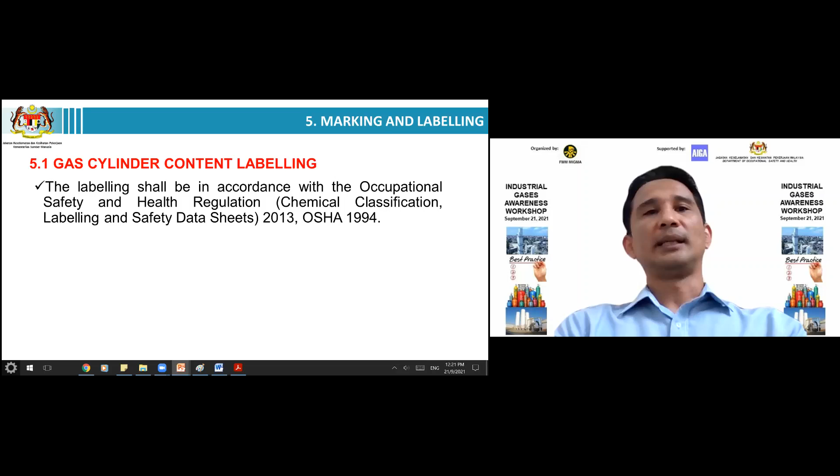Okay, the label should also have the general precautions that need to be taken in order to prevent adverse effects. And our responsibility is to read the label and read the SDS first before we use it, so that we know what type of chemical we are dealing with. Okay, next slide.

Handling and storage for transportation. Okay, cylinders should be stored, handled and used in an upright position whenever possible, unless they have been specifically designed for horizontal use. When we talk about transportation of cylinders, this guideline should be read in conjunction with any rules and regulations in Malaysia that set out requirements for things like load segregation, documentation, placarding, and load security, since they provide more details about this. So we just covered the very surface of handling for this guideline.

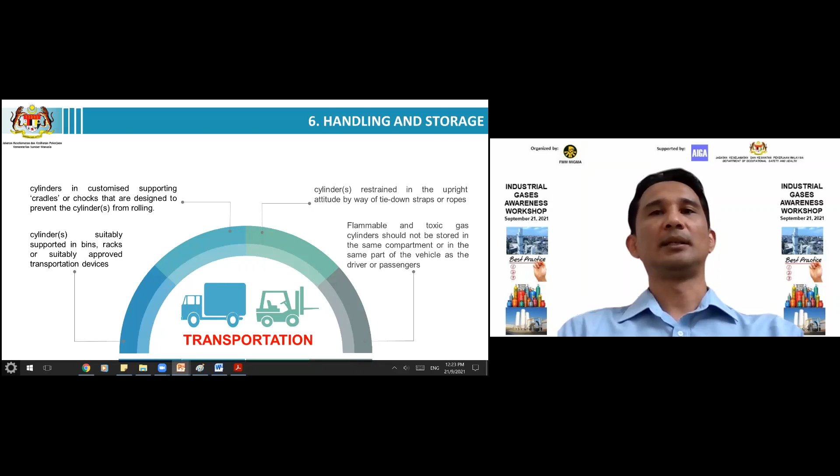In the case of flammable gas, cylinders should be stored in fire-resistant construction, as it will contain the fire within the area and hopefully not spread to other areas. If the area is poorly ventilated, toxic gas can accumulate to very high levels and may cause explosion or death to those exposed to the gas. Taking all of these points into account, we anticipate that the storage area for these cylinders is in good hands. Okay, let's move to the second last chapter, filling cylinders.

Okay, this topic is particularly focused on the responsible person to do the filling and what to check before and after or during the filling. And in this section also, we have set the minimum requirements for facilities or filling stations that need to equip before they start to operate.

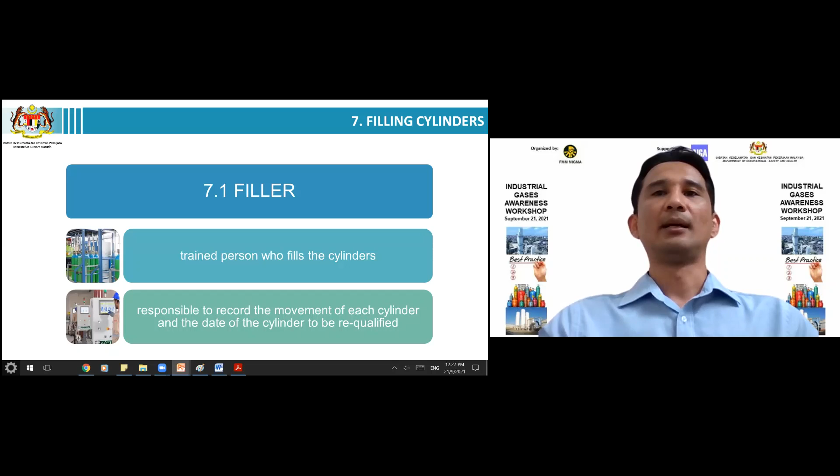And he also needs to ensure only cylinders with a valid re-qualification date can be refilled. That is the responsibility of a filler. Okay, let's move to the next slide, please.

Filling, okay, pre-filling checks. These are the things that a filler needs to check before he refills any cylinder. First thing is the cylinder is marked according to standard and still within the re-qualification test period. Good external physical conditions, cylinder marking and labeling are readable and correct. Valve is in good condition. Prior to filling, the filler needs to inspect and assure the cylinder is authorized for the gas.

Okay, let's see what else he needs to do during the fill up on the next slide, please. Sorry. Okay, once the filling starts, the filler should ensure that the cylinder is not leaking via its neck thread or valve, and he should never exceed the manufacturer's recommended rate of filling, and he is not allowed to leave the filling point at any time while the cylinder is being filled. He should be there all the time during the filling.

All right, let's see what the filler needs to check during the post-filling check, on the next slide, please. Okay. After filling, a filler needs to ensure the valve is closed, and remains closed before transport. Again, he needs to double check on the label as mentioned earlier in section 5.2 of this guideline to make sure it is correct. He then needs to verify the name or other suitable identification of the filling station.

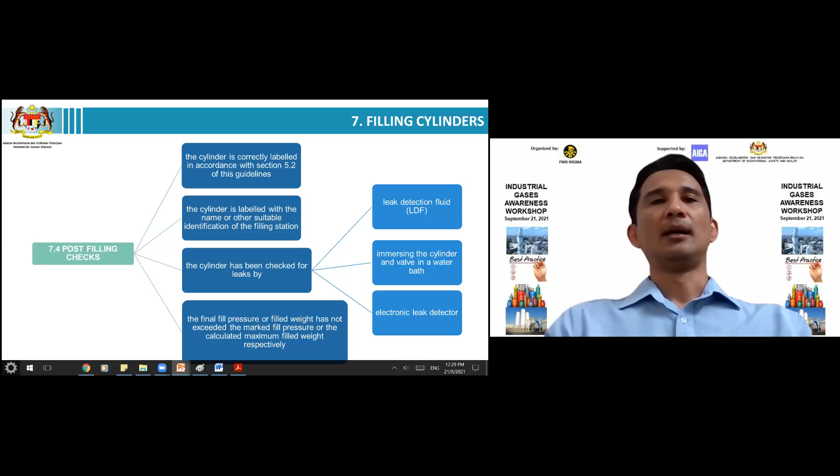Okay, let's see what we have on the next slide. Filling cylinders. Okay, decant filling. As far as I'm concerned, decanting is one of the most complicated issues to solve for the LPG cylinder, but I'm not really sure about other cylinders. Okay, for this case, decant filling by the weight control method is permitted for cylinders with water capacity less than 5 liters only, and the pressure must only come from the supply cylinder or tank to transfer the gas, meaning that a pump is not allowed here. Okay, go to the next slide, please.

Okay, this is just to explain what is likely to happen once you overfill a cylinder. When the expansion of the liquid phase takes place as the temperature increases, it may cause the cylinder to become liquid full. If the temperature continues to rise, the pressure in the cylinder will also increase, and will be likely to force the liquid or gas up through the pressure relief valve, risking valve malfunction, or other appliances not functioning.

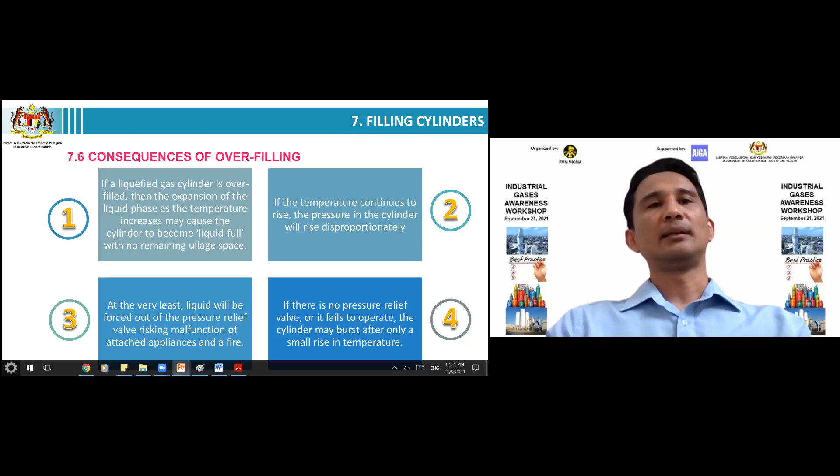If the pressure relief valve fails to operate, the cylinder may burst, even with a small rise of temperature. So this is the consequence of overfilling. Okay, let's go to the next slide, please.

Okay, cylinders shall not be offered for filling or transport when it is leaking, and, let's see, when it is damaged to such an extent that the integrity of the cylinder or its service equipment may be affected, and when the cylinder is beyond its qualification time, also we are not allowed to

refill. And then a cylinder may be offered for filling and transport when the cylinder and its service equipment have been examined and found to be in good working order, and also the required certification, retest, and filling markings are legible. Next slide, please. Sorry.

Okay, requirements for filling stations. The owner or occupier of the station who is responsible for day-to-day operations must ensure the requirements of the relevant act and regulations are complied with at all times. He not only needs to hire a high standard of competent filler, but also needs to keep all the equipment at his filling station well maintained. This is just the minimum requirement that an occupier needs to consider before operating filling stations.

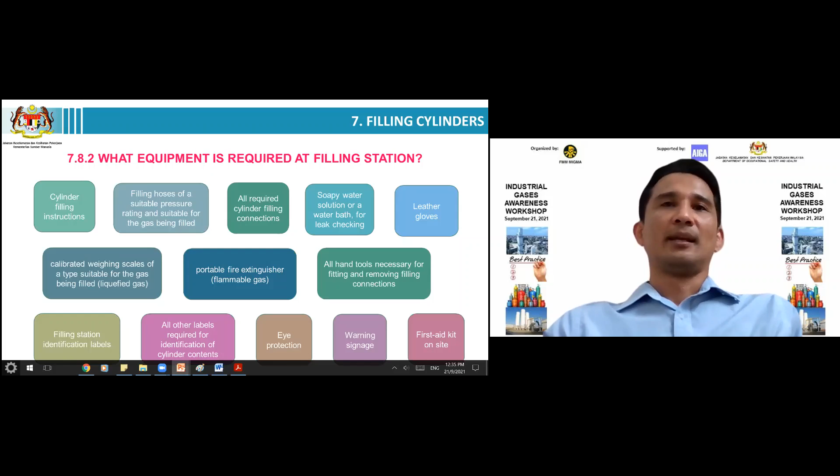Filling station identification label for easy tracing, just in case anything happens during transportation or in use. Next is identification label for cylinder contents. Suitable PPE like leather gloves or eye protection. Last but not least is the first aid kit and warning sign on site at all times. Okay, let's see the next slide.

Not to forget, a comprehensive risk assessment should take into account all possible controls identified in order to reduce the risk. Okay, next slide, very last.

Let's now take a look at our very last section of the guideline: inspection, testing, requalification, and disposal. Every new cylinder is subjected to testing and inspection during and after manufacture in accordance with the applicable standards.

To name a few standards related to periodic inspection, testing, and requalification of compressed gas cylinders: MS 1720, welded carbon steel gas cylinders, periodic inspection and testing; and AIGA 090, reference guide to requalification of gas cylinders.

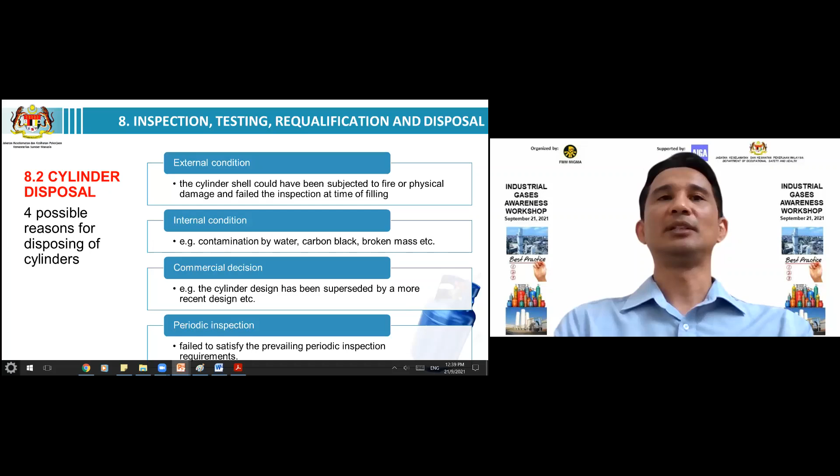Okay, next slide, please.

Disposing of a gas cylinder correctly is extremely important, particularly in today's climate of environmental awareness. If we dispose of cylinders as normal waste, it will create safety hazards for the landfill and for recycling workers. Compacting or crushing a disposed gas cylinder may result in fire or explosion. A correct disposal method will improve public relations and help you stay in compliance with local authorities and requirements. These are the steps to dispose of cylinders.

Once you've donned proper PPE, you can release the residual gas content in a safe manner, then remove the valve, make sure there is no gas left in the cylinder, and damage the thread neck completely so it cannot be used again. Finally, cut and destroy the cylinder.

There is a special requirement as mentioned before for acetylene cylinders. You can refer to AIGA 036, 16th revision - that's the Asia Industrial Gases Association management of waste acetylene cylinder, or other relevant international standards.

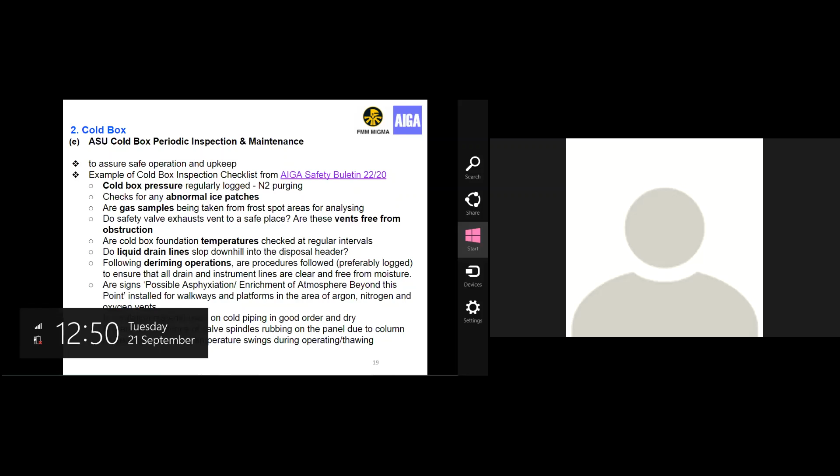Yep, okay, thank you Jaslyn. So I think the doctor can refer back to the AIGA Safety Bulletin 22/20 for the cold box inspection checklist, then you'll have a better understanding.

Okay, then maybe we quickly take another one or two questions before closing for today. This is a question from Encik Nizam to Anthony: Is there any requalification requirement for gas cylinders? If yes, what is the time frame?

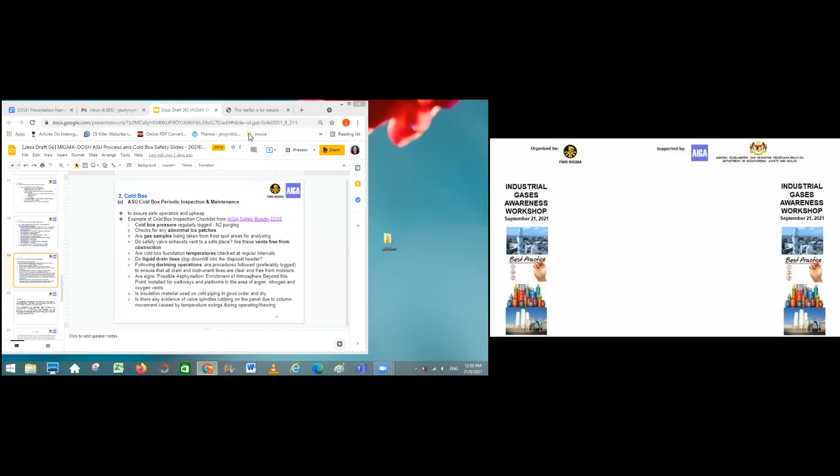Okay, so for gas cylinders, the requalification is normally 5 years or 10 years. There is a specific requirement inside the standard to ensure the internal dryness of the gas and also the cylinder's internal condition before extending it for 10 years. The reference standard for this requalification requirement is MS ISO 6406 for steel cylinders, 10461 for aluminium cylinders, MS 1512 for DA cylinders.

Okay, thank you Anthony. This is Encik Samsul Izzah from UPM, he has a question for Encik Iwani: Is there any special regulations related to customized gas mixtures? He gave an example like 25% methane in hydrogen, 1% helium in air, if let's say it's inert - is there any difference in regulations? Encik Iwani, you want to answer?

Okay, as far as I'm concerned, I don't have any exposure to the question. To be honest, I don't really have any idea. I mean, if there is any specific regulation, is there any specific standard that we are referring to? To be honest, I don't have any idea on that.

Okay, thank you, Iwani. But maybe just to share, from my understanding, if this is a flammable mixture, then there should not be any issue because it's flammable gases. But supposedly you want to have a mixture with oxygen and hydrogen, for example, then there are some special requirements or some procedure we need to follow. You cannot simply mix hydrogen and oxygen, right? But if you're mixing inert gases with flammable, or inert gases with inert gases, I don't see any issue or concern. Or maybe the technical committee, anybody else want to add on this?